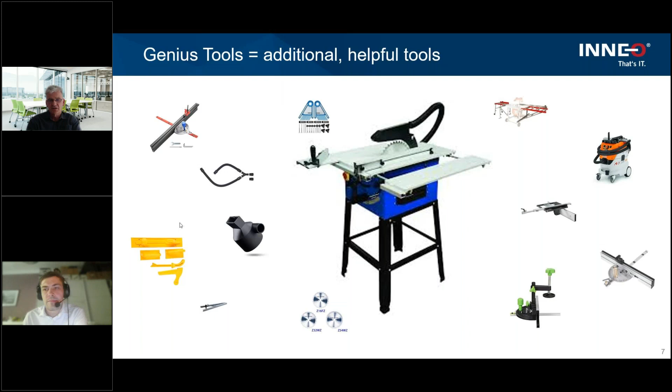This is my picture. In the middle you have this table saw. This stands for Creo, but we need additional tools around it to become more precise, to produce our products faster. So we can buy additional tools to work in a better way, faster, more efficient, and much better than only with Creo.

And what are these Genius Tools and the different modules? On the left side, we have all the Creo-related modules, and on the right side, we have all the Windchill-related modules. And here at the bottom, we have the functionality included in the different modules you can buy. Here in this middle row, you see all the modules you can buy: parameters, library, starter, other tools, or Windchill tools.

And then we have packages. We made some packages for you to get a better price. What we are talking about today is the startup tools, especially for the Creo side. We have these three modules in the package we are talking about today, all the things which are included in the startup tools, short SUT. The red arrows show what is included in which module or package. This is our structure.

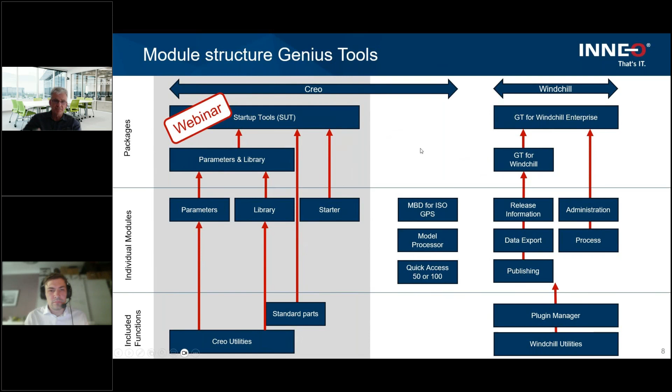Now I want to give you a short introduction to parameter, library, and starter. In Creo, you're working with a lot of parameters, and handling them in native Creo is not so easy. So we have the Creo Genius Tools parameter tool to handle it in a much better, more efficient way, so your work becomes much easier as a Creo admin, for example. The target is to make classified parts, assemblies, and so on, all in the same way everywhere. That makes it much safer to work with these parts and drawings. And of course the position numbers of Windchill also come into your BOM.

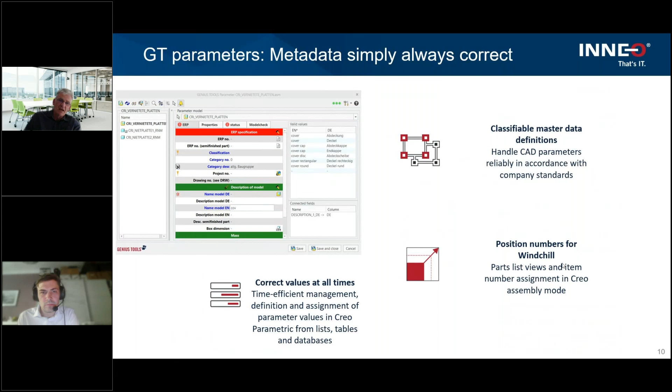The library is a complete library management based on these parameters. You can search and find based on these parameters, so in the end you have a search something like Google. It is so fast that every user, I'm sure, will use this library, and that makes all your following processes much safer, because the users can rely on the quality of the library. It is 100% perfect.

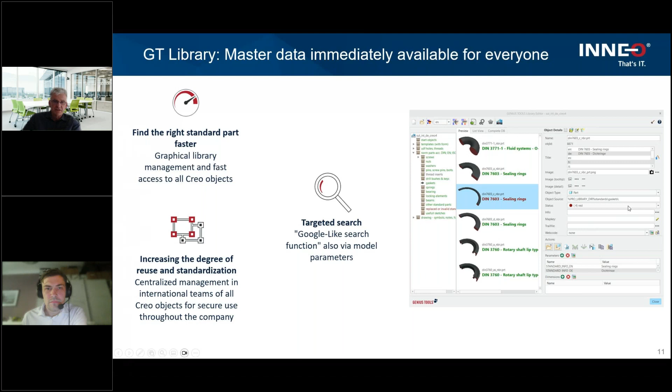And what is the starter? Perhaps you're working in different Creo environments, for example Creo 4.0 or 7.0. Perhaps you have to work for different customers in different environments, with different configurations and different licenses. That also means you don't need all your licenses every time, so you can save a lot of money. With the startup tools, you book only the licenses you need for your work. In the end, you're sure you're working in the specific environment without thinking about it. Just a click and you're working.

Next, I want to talk a little bit about the standard parts, which are included in the complete startup tools package. INNEO invented a lot of standards, thousands of different standards. This list is not the parts inside, these are the standards we offer to you. It is not only parts, it's UDFs, sketches, and so on. So you get all these bolts, washers, nuts and so on included in the startup tools. This means you have no more work with these standards.

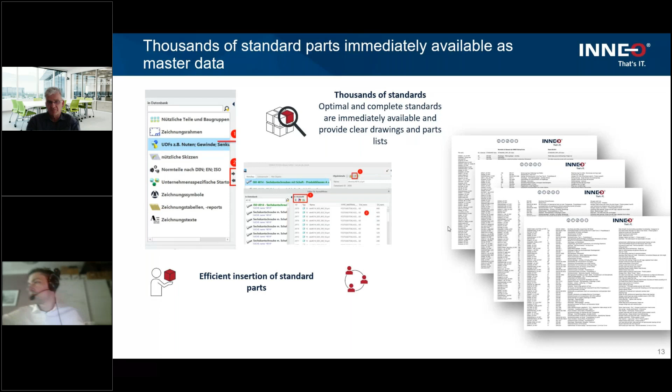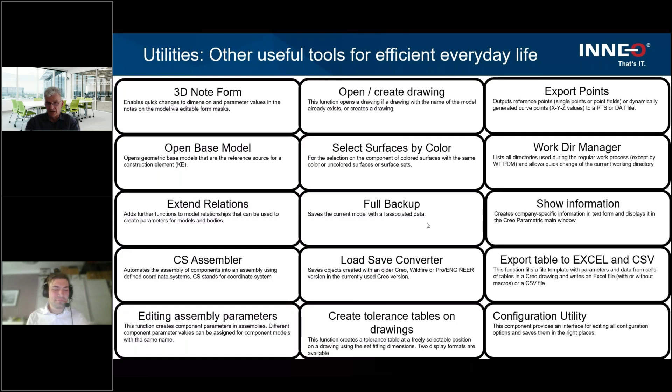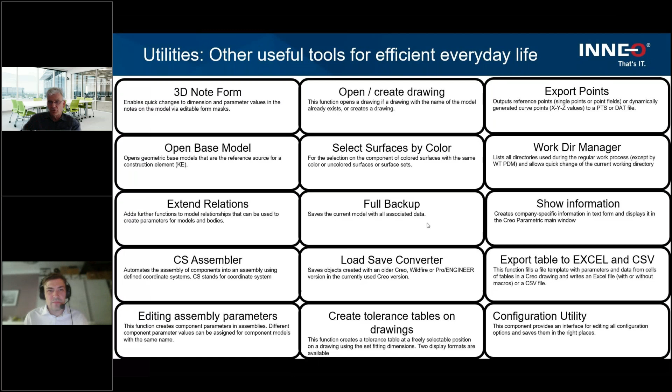And last but not least, we have the utilities. There are older ones and newer ones inside. These are a bunch of small tools that help CAD users work more efficiently and smarter in their daily life. So far my short overview. Eike will show you this live, which I think is much more exciting. Eike, now it's your turn.

Yeah, sure. Perfect. I'll start to share my screen, show you some of these tools live, and explain what they are doing. If you have any questions, please feel free to directly interrupt me or write in the chat so Nick can read it and give me a hint. That makes it much easier and more fluent if we can directly talk about your questions. Okay, let me try to share my screen. Hopefully it works. Great. So this one is Genius Tools Starter.

Most of you, I think, have startup scripts like batch files, or small self-written applications that help you start Creo on every seat in your company the same way. But not exactly the same way, because there are many small things people can decide: whether they want to start with an AAX license or without, or whether they want to start special applications like toolkit applications. Also, you don't have a license for everyone, so you need to check whether a free license is available right now. So people can decide what they want to start up.

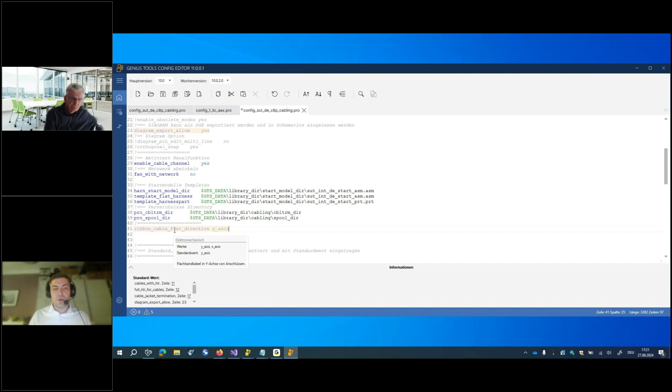And it's not a standard text editor with a little bit of syntax highlighting. You also get things like auto completion of words. So if I go here to pro spool, sometimes I've got yes/no options, or here, there's one with a y-axis. So I want to change that. I go into it and I directly get the information about what is available. So I can simply say, okay, I want to use y-axis, and then it says, oh yeah, but what you have chosen is the standard value. Here's Standardwert, that's German. Let us change that to English. So default value.

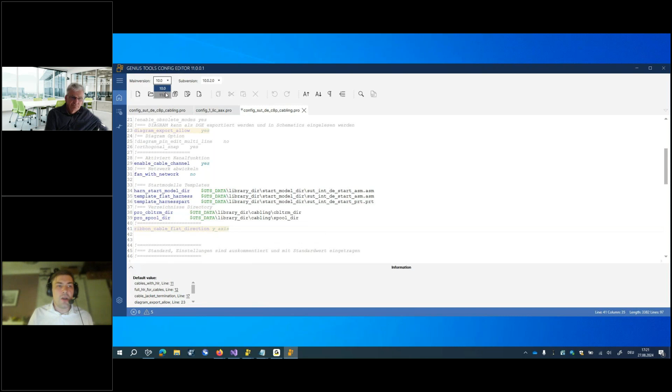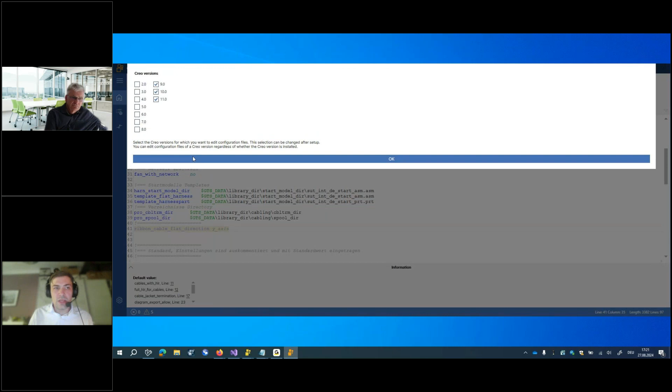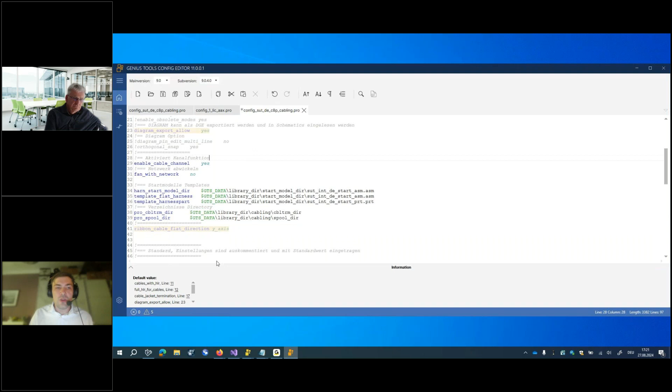Okay, but that changes with every main version that I have. So I can download all these main versions. In my case, I now have 10.0 and 11.0, but we also have the possibility to get all the older versions. If I go down here, I can say, okay, I also want 9.0 to be available. It automatically downloads the database and checks that everything is up to date next time I use it. Then I can define the main version or sub version that I want to check against, and it automatically rechecks the complete file and redoes all the syntax highlighting. It checks if it's a default value, checks for errors in the values if something is not possible, and checks for double-set values, so I'm a little bit more informed about what happens in my config.pro.

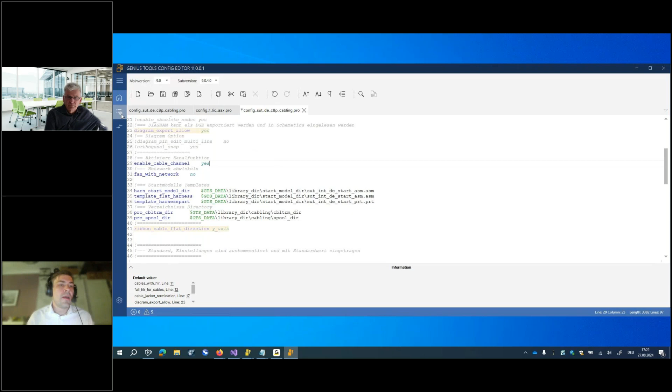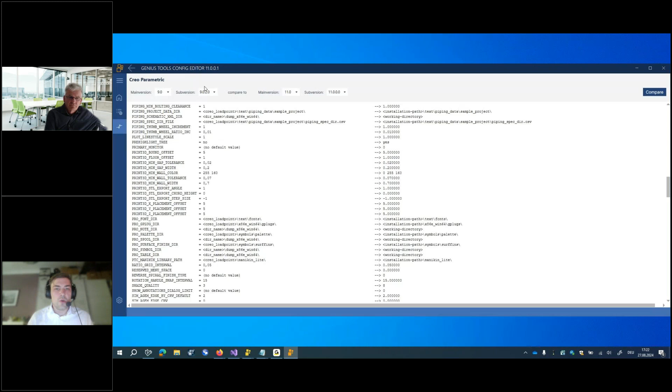Sometimes, not so often, I need an update. So I say, okay, I'm at 9.0, at 9.02, and I want to update to 11.00, the newest version. Here's a small tool just for administrators. I can click on compare and I get the information about which values have changed and whether it makes sense or not, if the defaults have changed, or in this case, it changed from an int to a double value. So it's much less that I need to check than if I directly look at everything. That makes it a little bit shorter. Mostly it shouldn't be that way; that's only because PTC sometimes doesn't like to publish the complete list. So that looks much more like the list that I want to have.

Then the complete information is the same. So I know, okay, allow ply cross section now changes from yes in the 9.04 over to now be a hidden value inside of the 11.0, but it's available. I can use it. It's not supported, but I can use it if I need it. And also the same things for standard display axes, stuff like that. If I know that, I can change that inside of my config file, and I know what I need to work with. That makes it much easier to work with it.

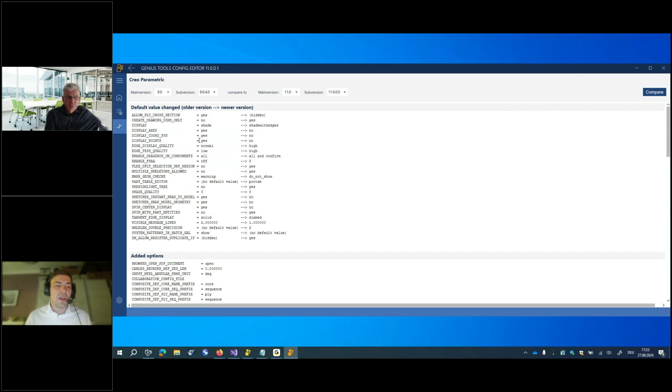And many people don't change from a 10.01 to a 10.02, where you get all these informations. Most people are changing from a 7.0 to a 10.0, and so there's much more information in the background that I need to think of. We also got a batch mode here for the rework of your config.pro files if you need it. So if you have set fixed paths, but you want to be able to down synchronize from your current server down to a complete variable path on a client, then you can say, okay, I want to replace automatically fixed paths with variables that I can use to start up with.

After we have all the configurations, we have some project options that are the same that we see here too. We have a backup possibility for your customization.ui. So sometimes you want to go back, especially as an administrator, to the standard configuration so you can make an admin UI and afterwards play it out. So this would be an easy way. You simply click on save and save your customization UI, start your Creo, manipulate whatever you want, copy your customization UI as an admin UI, and then there's a button to get it back. Here you simply click on restore and it asks, okay, do you want to delete it? Yes, and then it's back again.

And the thing that I have mentioned before, if you have changed options inside of the project that could be also available for the users if you want to, you can give that a name and save that as your own special topic or your own special project that you want to start up every day. So you don't have to select that every time.

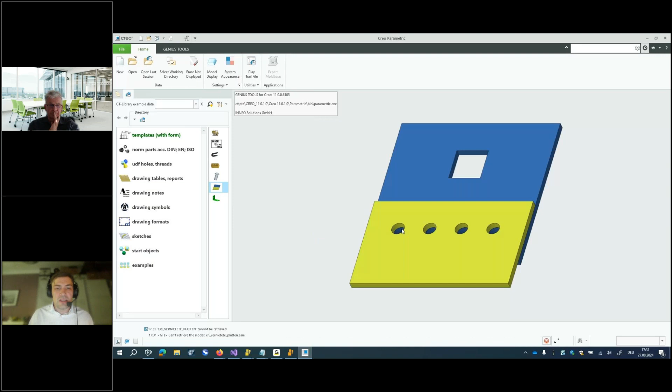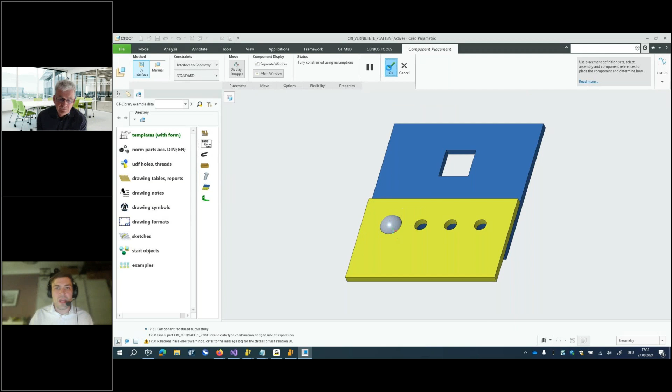Then I also have the possibility to use drag and drop from here. So I can say, okay, drag and drop directly from the library into my thing. If there is an interface, it automatically connects to the interface and gets built in. If there's no interface, I can also put it here - oh, I need to end that, I can't pull it if it's not possible, but okay. Then it simply goes to the standard and I can build it in like a standard part.

So, like everything. But sometimes I don't like that - sometimes I want to get more things, so I can use right mouse button, open simplified representation, copy the file automatically in a Creo copy state. There I can also put in a copy configuration, a copy list.

Sometimes I not only want to copy a file, especially if I have a family table or a sheet metal part or a part that is an assembly. It could be that I have multiple files in the background that I want to copy every time with it. So in this case, I can define a copy template in the background, and then it automatically copies all the files, and I can also define the naming, how it should be named.

For this, there's an editor. Like in every of our tools, there's a graphical editor because it makes it much easier to work on that. And I can go in.

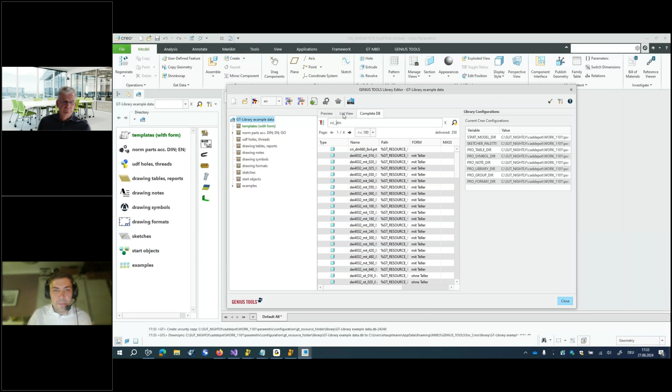So let us look for the nut - I don't, for the bolt. I don't know where it is. Am I in the right library? I'm in the right example data. Yes, that thing wasn't named bolt, it's named CRI DIN something - okay, some of my colleagues have renamed it. CRI DIN 660, something like that. There it is.

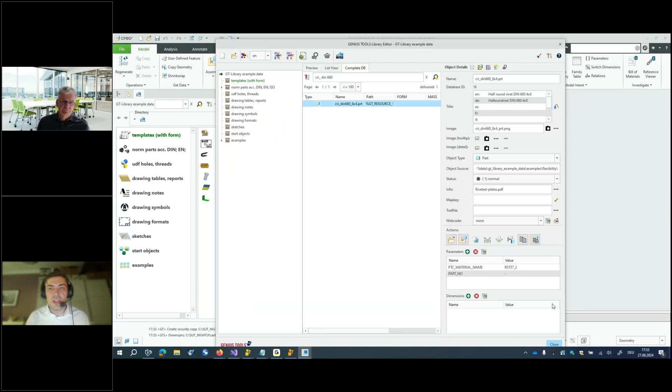Great. And then I can go into it and say, okay, I want to get a model list for copy purposes, and can only copy this, or I can add multiple more files, and then create a rule where I say it should be a new number with the old name behind it, or it should be only a number. So if I work with Windchill, most of the names are only numbers. Should the number be copied over to the common name? Shouldn't it? Should some drawings get the same number or get their own number, and all these kinds of stuff - I can define all this in here, and afterwards it's possible to use it.

I've got some more things that make it easy to use. If I look inside a screw, I have directly the possibility to filter down here for different variants. I get a new picture here that I can put there.

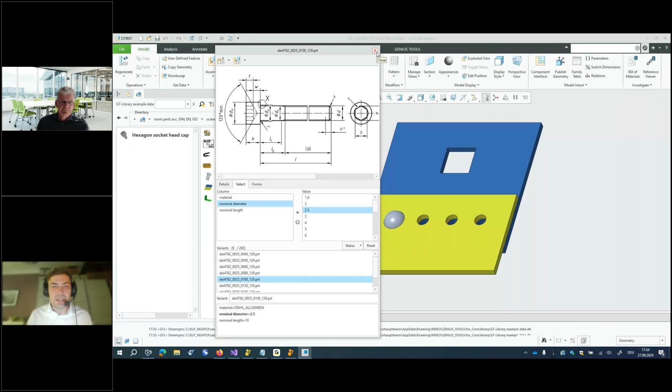We have many more things into it, like support for note texts or symbols and all that kind of stuff. So it's not only parts, drawings, and assemblies. It's also notes that I can directly bring in, or drawing tables, report tables, UDF support, and we got something that calls forms.

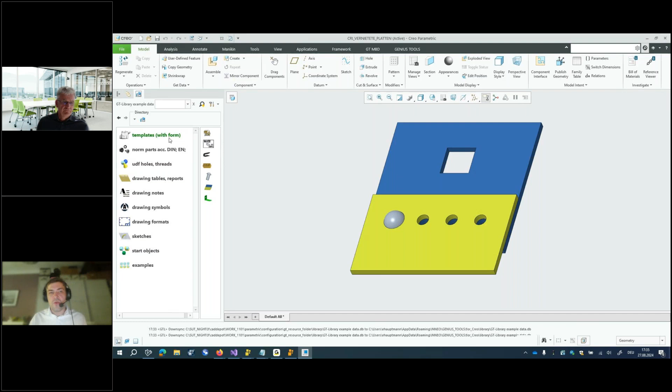So what is forms? Forms is short for formula, where you can put in things directly, like this one. So I open it, I get this formula to create a new sheet metal angle, and I can directly say, oh, here I want to get a bigger width. The width should be 60, and the bend angle should be 100. That is the material, that is okay. If I want to get the holes, or if I don't want to get the holes...

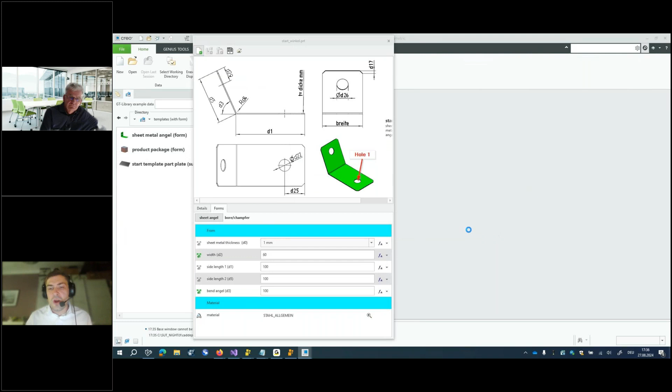And then I say, okay, create it. So now it loads the template in the background. It looks, okay, is there a drawing on that? How is the naming defined? I click on OK, and it creates now, I don't want that right now, it creates now the sheet metal angle directly to my specifications.

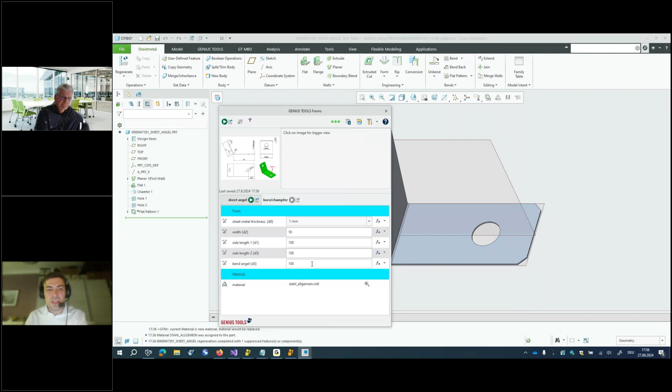But as every time, I make a typo into it. So I simply can reuse that, reopen the same formula, change it directly here, say, oh, width should be 50, and say, okay, it should be renewed on the part. That is not only good for things like the first creation, that is directly saved in the external data of the model. So it has every time the same version as a part has inside of my Windchill system or my ERP system, like an SAP.

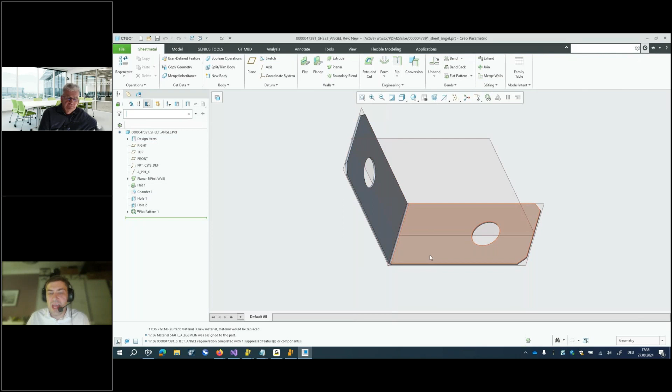So I can simply reload this thing that a colleague has built up, and he can give me the most important values that should be changeable in an easy list that I now can use to change all these values directly on the part.

And I don't need to look inside of the configuration, inside of more information that's somewhere around, or inside of the Windchill where someone explained to me, okay, yeah, I have put everything into the parameters, so you need to go to the parameters, go down the complete list, and there at the bottom, you need to change these two parameters, but they are restricted. I don't know what I have done there, but simply try and figure it out. Everything else you can read out of the relations of the part.

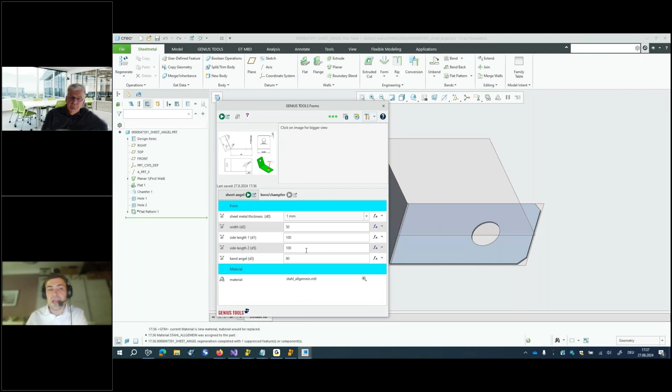Yay, great, I love that. In this case, you get a graphical interface where you can simply type it in. The build up of the graphical interface is very, very easy.

So if you have a new part, simply create a new one. I make it the most complex part I can do. That is a cube. So that's why I'm a programmer and not a CAD user. Oh, so it's a cube.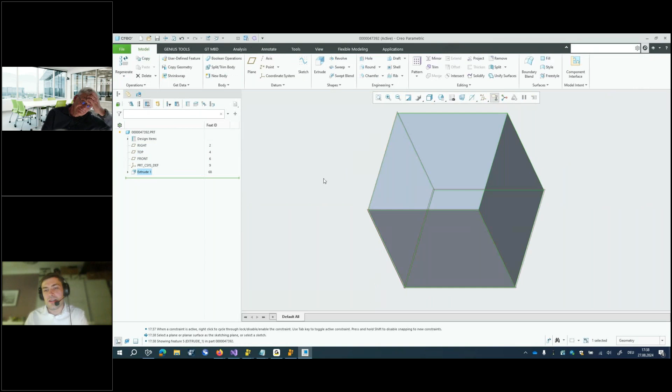Okay, so let us make a formula for this for colleagues. So I simply click on forms and open it. Here's no icon at the moment because there's no forms saved inside of this model. Then I go to the editor. Like I say, everything has a graphical editor.

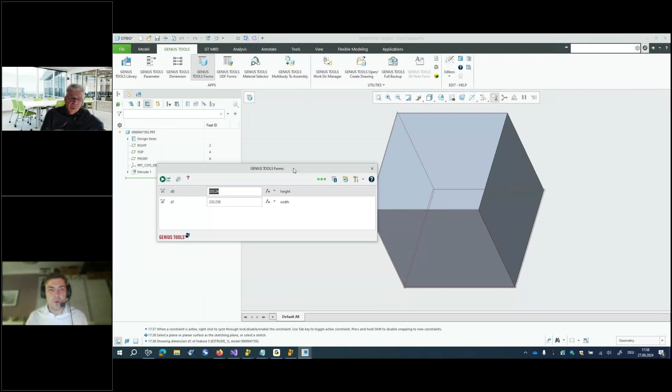Say, okay, I want to change the height and I want to change the width. Name this width, name this height. Save and close. Okay, I have created my first formula, my first forms. And now I can use that to change everything I want.

Sometimes I want to get it a little bit easier to use. So I say, okay, yeah, but we have standards, so please use that. So I can create a value table here and put these dimensions or parameters or suppressions inside a list. It's a little bit like a family table, but with much more possibilities. So I add the D0 and the D1 and create some, and I make one that is small, medium, and big.

And we say it's 100 times 100, 200 times 100, and 900 times 100... 900 times 50. Looks bigger.

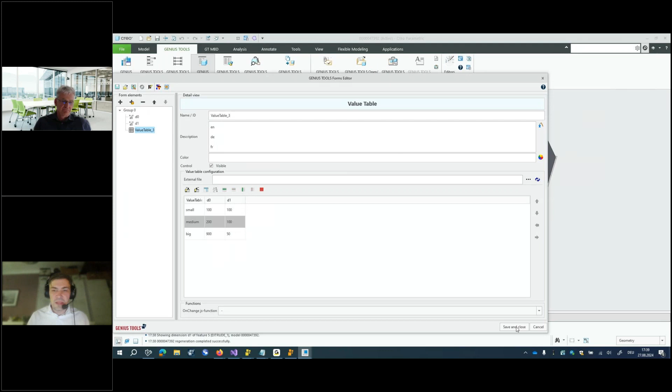Okay, save that. Afterwards, I can simply define here, go through it, and every time I click on save and regenerate, it automatically saves and regenerates it. So that's easy too.

Next, I might need some more rules. I can add that with JavaScript rules, so I have the possibility with JavaScript to give it more information and directly connect things between each other.

I also have the possibility to import from an existing CSV file, and we can also export to a CSV file. So that makes it much easier to change these files, get all the information ready, and reuse them if we want to. We can also use these changes inside of this.

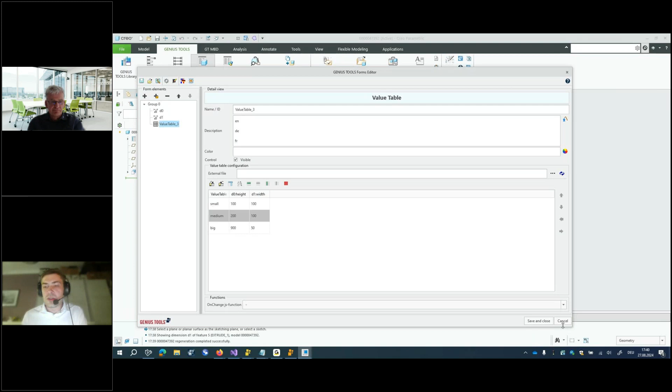I can also load from an XML or load from a CSV, define the loading structure, and automatically insert that into all the connector points where I would name that. So if I have an external tool like a configurator where people can click things together and give me values, I can directly read in those values, click save, and it automatically transfers to my model and rebuilds it. That makes it easy to use.

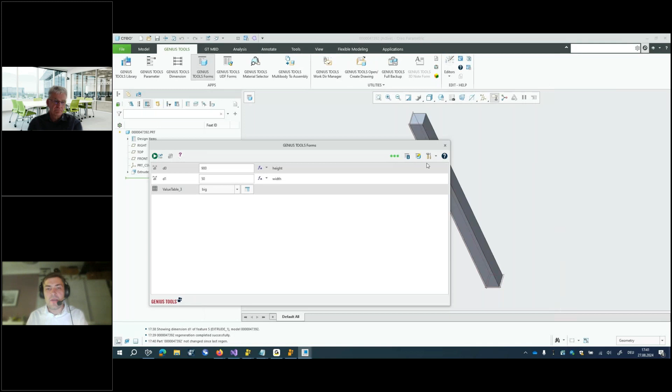It can also be used in assemblies, so if I want to change not only the assembly but also sub-assemblies and parts, this is also possible. If I'm in an assembly, I have a few more possibilities to choose from, and I can also select dimensions from sub-assemblies or built-in parts, model parameters, feature parameters, all that. You can build in separators if you want.

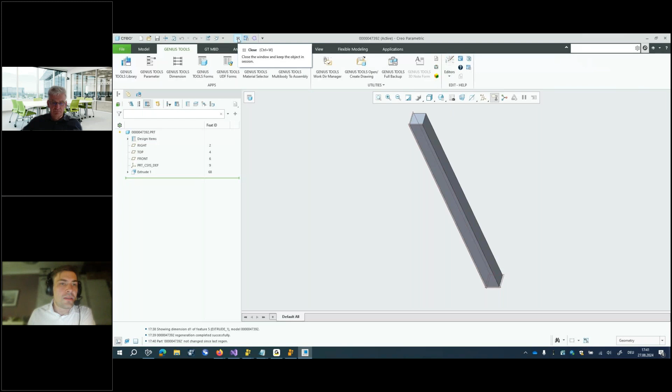At the end, I can show a very good example that a colleague of mine built with it, which is really nice to look at. But we need to watch the time, so I'll show it at the end.

Okay, so we've seen forms and we've seen library. We have the same thing for UDFs as we do for forms. So if you're working with UDFs, there's the same kind of thing as forms for UDFs, so you can build in an easy solution.

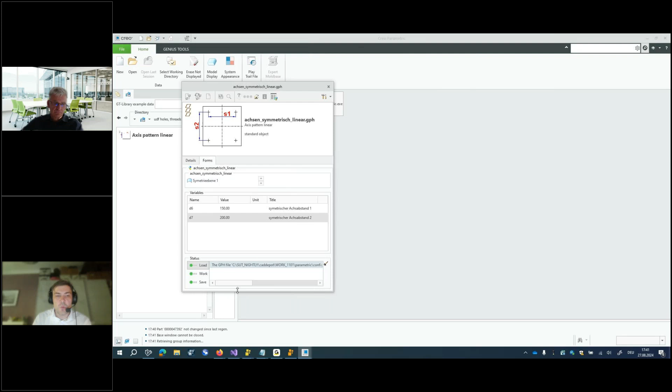Simply define it, and get your different references that you need to define. What's good about this is that you can reuse it. Let me reopen the part so I can show that. Open in session... it's this one, okay, delete that. I want to recreate it with a UDF.

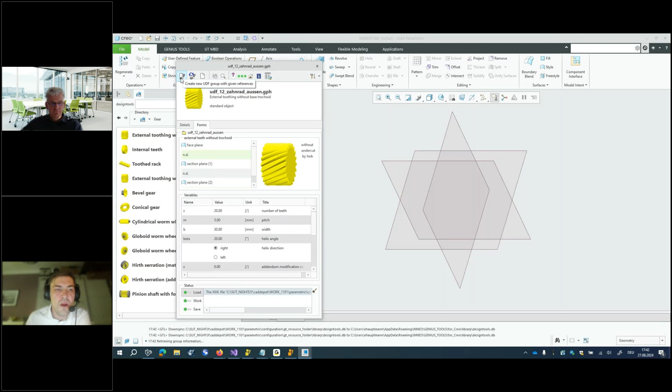Create new UDF with given references. If I've already selected that, fine; if not, it asks me for it. Okay, so that's the standard, I know how to create it. But afterwards, after creating the UDF, I can simply change it.

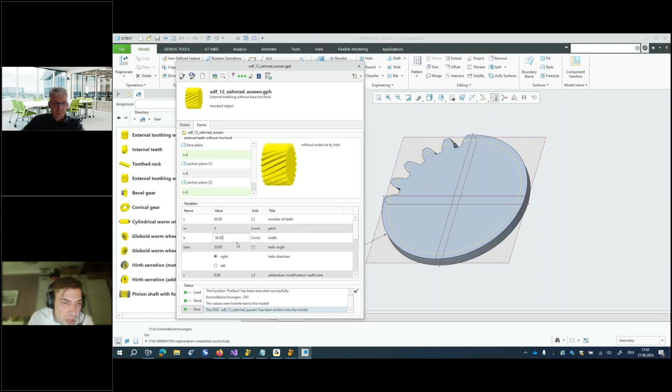Like number of teeth is 20. I think there should be something like shown teeth... I don't know if it's this one, simply change it, save it... no, that wasn't the right one. Something should be shown teeth... number of teeth with helix angle, number of displayed teeth. Here it is, okay, 20. So it looks better for the gear.

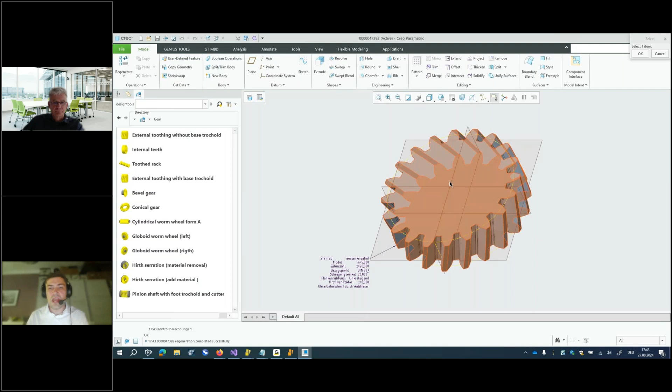Great, so now I've finished it. I close it and check it into my vault. My colleague opens it and sees up here, oh, there's a formula on that, but there's also a UDF form on that. Great, I click on the UDF form, I click on the UDF, and it automatically comes up with the same values.

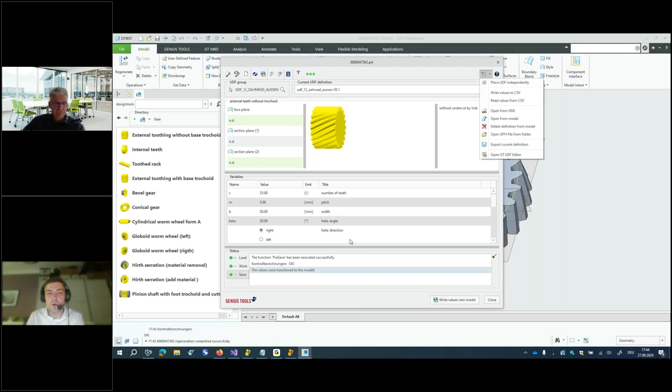So he can say, yes, that's right, but I don't want it like that, I want the number of teeth to be 25. So I can simply change that, save it, and I've got the updated number in it. Also here in the background, you can use JavaScript and all the different possibilities available in the standard. And here too, you get a complete graphical editor to create these formulas, these UIs, and use them, making it easier than writing XML files.

What do we have now? We've got parameters. So that is the thing that pops up sometimes while I have shown you, because on my machine I have defined it to pop up every time I create a file. So most people inside of every company hate to fill up parameters because they have to. There's a model check that flickers up and says, oh, I don't want that. You can't check it in. People hate to fill up parameters.

But on the other side, people love filled up parameters because then they find the files again inside of their Windows system or SAP, or they can connect to something and automations can work. So they love filled up parameters, but they don't want to fill them up themselves. So the best thing would be an automation for that. Okay, that is the thing inside of Genius Tools parameter. You can't automate everything. It's not possible. Sometimes they need to make a decision how to do this.

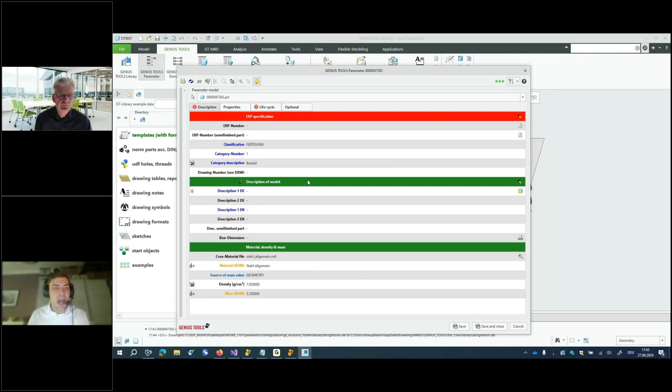So I open this, it automatically opens for the right model. We've got a description here. I can click on that and I now have the possibility to directly choose. I don't need to type it in. I know only the English one. I click it and it automatically fills up the German one too. So that makes it easy.

Also, this was a mandatory parameter. I don't know who has seen that there was a red exclamation mark here. Here's a red exclamation mark too. If I click on the life cycle, oh, here, something is wrong with that. There's a rule behind it, and I need to fill out the date right. But I don't want to type it in myself. I simply can click up here and fill in the current date.

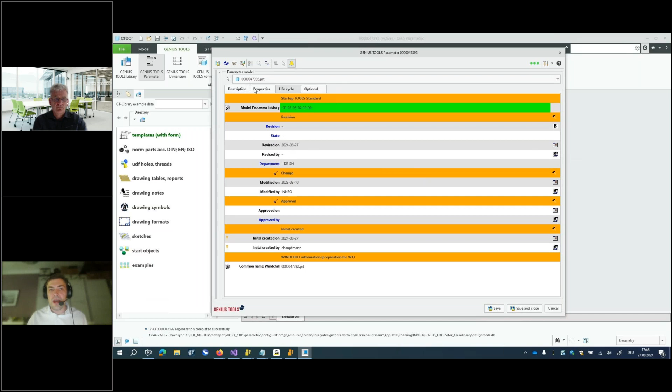I have some mandatory fields here that I need to fill up. I can fill it up manually, sure, but I can also say, okay, fill it up automatically, and it fills it up automatically. Now all mandatory things are filled up. I click on save and get a big green bar down here that says, yeah, you have done everything right. You have filled up all mandatory parameters. You're great. Now you're allowed to work here. I can go over to properties.

And also sometimes we have lists that need to be known to fill up special information, like for coating code. There's an ISO standard, the 4042, and that explains how a coating code is built up, and what it means. What is the chemical element, the thickness? But the coating code is not like you look at it and think, oh yeah, that's it. It is a strange thing based on some numbers and some characters. So to make it easier, we have here the possibility to build in lists. All that is completely generic, so you don't need to have these parameters or this list, but as an example, we use this.

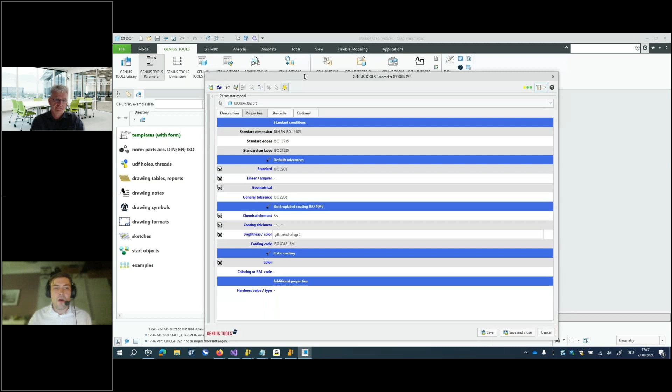So I choose a chemical element like tin, then I get the coating thickness like 15 micrometers and shining olive, and it automatically creates a coating code. Only the coating code is saved to the real Creo parameter. All the other things get built up automatically based on the coating code down here. So I can click here and see which are the active filters that build up this one. If I now save, it automatically reloads and it's fixed. If I want to change it here to 25, it automatically changes down here. I click on save and it's in.

Also the same for RAL codes. No one knows the RAL codes. Maybe the four or five most used ones, but not all. And so I can simply click on that and get the information up here, what it would be. Hardness, value, and type. I simply can choose from a list. I don't need to know all these things. I can choose from a list, and that makes it much easier for people to use.

And also these standard parameters that should be used are different between different types of parts that are being created. So if I have a standard part or a part that should be used in a medical environment, I have different standard parameters that need to be filled up. So I can create multiple of these definitions and save them here as simple files. There's an editor for this. And afterwards, I can choose it here. It automatically fills up a standard parameter inside of my Creo parameters.

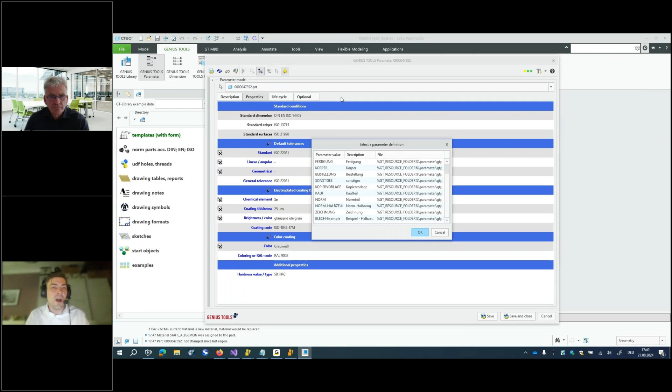And at the next startup, it comes up with the same definition. So I don't have to change that. I don't have to know which is the right definition for this part. It tries to choose that automatically. So if it's a sheet metal part or something like that, I know that I can choose it automatically. But if that is a part that you are creating right now, I don't know what is special about this part. So you need to choose it once, and afterwards it gets shown here automatically. That makes it easier. Okay, save and close.

Then we've got a material selector. Materials are a thing that is a little bit difficult. So you've got them here in the model tree. You've got these PTC system material properties, starting with, I think it's Creo 7, with the bodies.

So sure, you've got many of these differences, but also then if you only say, yeah, but I only use standard materials. All our bodies, if we are working with bodies, have every time the same standard material. Okay, that's totally fair. Then you don't need this view, but you have materials that get older. And this one could also check, based on a material parameter that you can define, automatically if your materials are old and not on the current state.

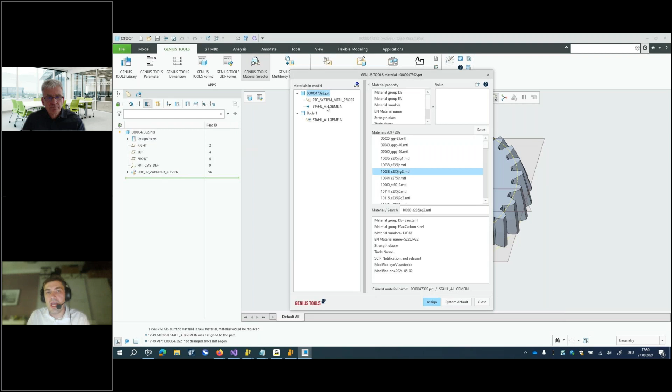And then you've got an update button here, update all materials, and it automatically runs through and updates all the materials to the latest material version, and therefore it's up to date. Materials get saved into the model every time, so if you change anything on the materials, they would never be automatically updated into the models. This one would do that. You can also configure that it shows up here automatically at the moment that a material gets too old and should be reworked or replaced.

We've got multibody to assembly, because if you want to make an explosion out of a multibody part, that is sometimes difficult. You can use this to create an assembly out of your multibody part and use that.

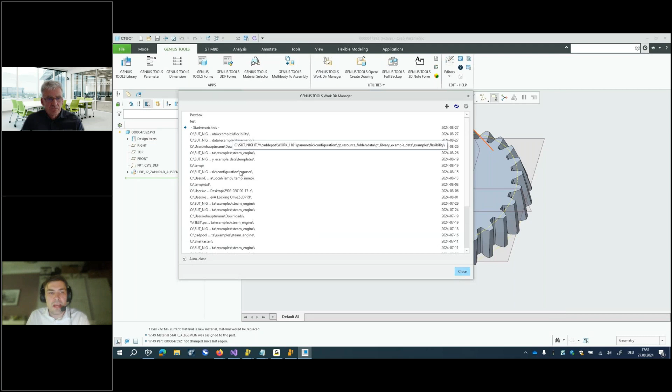If you aren't working with Windchill, then you mostly have multiple working directories next to each other. So we've got a workdir manager where it simply checks every working directory that you have opened in the last time and automatically creates this list, so you can simply change to a different working directory by a single click. That makes it easier. It automatically populates, fills up. You can rename it, right mouse button, edit the command.

Great. We've got full backup if you need backups, and many utilities like feature regeneration profiler. If you're not on Creo 11, then sometimes it's only 2 or 3 features that make your part regenerate very slowly. Then you can use feature regeneration profiler and check which of the features are the faulty ones and which of them need most of the regeneration time of your part.

So in Creo 11, it's much better. It's from PTC directly in it, so don't get me wrong. But before Creo 11, it could be a good idea to have this possibility too. So we will remove that as soon as we get to Creo 11 as lowest supported version. Then this one gets out because PTC has it in.

And then we have many small tools like Genius Tools Points, where you automatically can export point matrices. We've got surface by color. So sometimes if you have parts that get brightly colored, the colors have a meaning behind them. You simply can click here and select the surfaces by color. In this one, there are only uncolored surfaces, and so I can select that. It automatically calculates the area in the background and shows me everything that I need to know about this area.

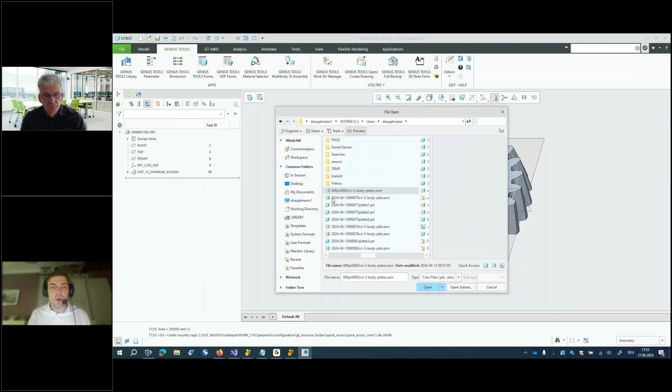I can click on open file or whatever, and it automatically sets a type. I can put in every mapkey that I want to make it easy. So like the recording of a mapkey. Normally I need to search for mapkeys here and then click on new and then decide how I want to name it. And afterwards I need to save it. In this case, I have a mapkey to create a mapkey. So I simply click on that.

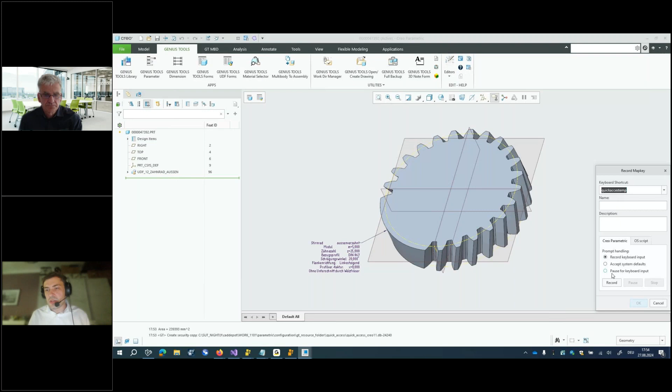It goes to record mapkey. I go to record whatever I want. Stop that, click on OK, click on close, click on yes. I don't need to do that. I can also leave it open. And then I click here to save changed mapkeys and open with Notepad, and then the mapkey gets automatically opened in Notepad.

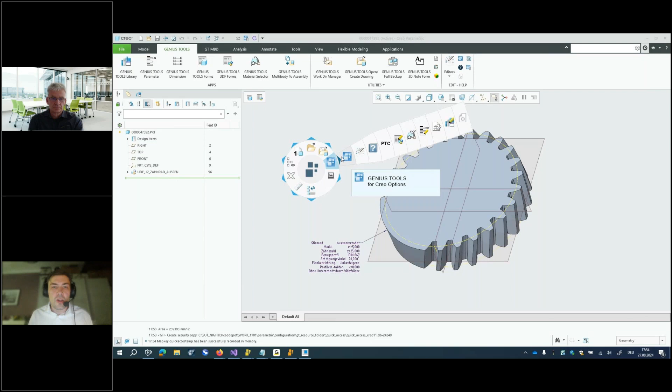So that makes it easy to copy it out and to reuse it. Also, I can use variables inside of that. So I can show that best case. Oh, let us do this as an admin here.

You must have come to the end. We have 5 minutes left. Oh, I should speak faster. Yes, I get that. No, you're fast enough. We have too many functions in here. Yeah, sure.

But the easiest thing would be, if you're interested in one of these, simply go over to Tristar, ask them, and I think Nick would manage that. You get an easy walkthrough and an easy deep dive into the special modules you are interested in, that makes it easier.

Back to the quick access editor, one last second. You can use variables inside of that, like environment variables here, or the current date, or the current model path, or the current model name. So it is great if you're exporting a PDF to have the model name in it, but most often I also want to get the PDM revision into it.

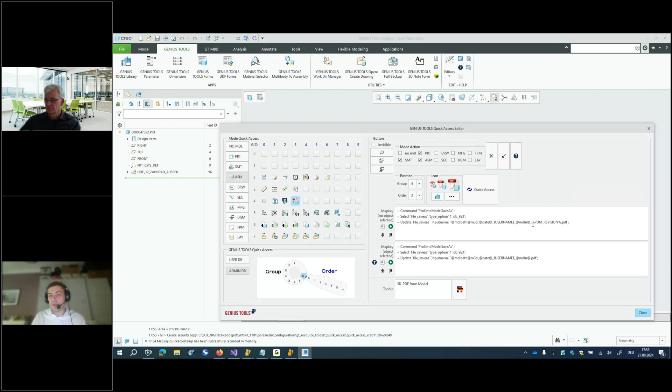So I can directly write it into it, PDM revision, and then afterwards, if I use this map key, it would automatically replace it with the variable in the background. So I get the current PDM revision of the part directly printed to the name of the PDF. And that makes it easy to use, so people like to use it.

Okay. Yeah, we have lots more functionality inside of drawings. So here's also stuff like Genius Tools Inspect if you want to do inspection symbols, or if you want to create tolerance tables and stuff like that. Simply click on that, create a tolerance table here. So it's mostly smaller tools. Inspect is a little bit bigger.

We got the same for 3D. So if you want to place inspect symbols in 3D, but that's another topic. And we also got the possibility to create BOM information. It's called Genius Tools Assembly, directly based on the current assembly that you have opened. So also something that could make your life easier.

And in most of these tools, you can build up exports. Then you can also directly use this table to Excel that helps you export all of this information, like a parameter definition, like the inspect symbol definition, and everything else by a templated export directly to Excel or to a PDF. So now I have to stop your enthusiasm. Yes.

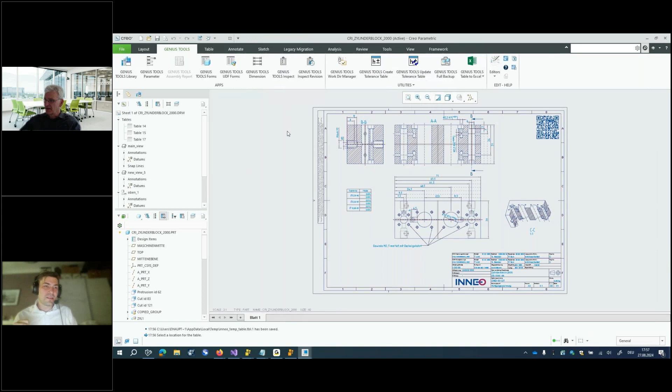Unfortunately, I just take over my screen and want to come to the end. So the end means, how can we come together? Your first contact should always be your account manager from Tristar. If you have any questions, please contact him, ask him. And you saw this was a firework of functionality and benefits and so on. Your account manager doesn't know everything about that. So we have to talk together.